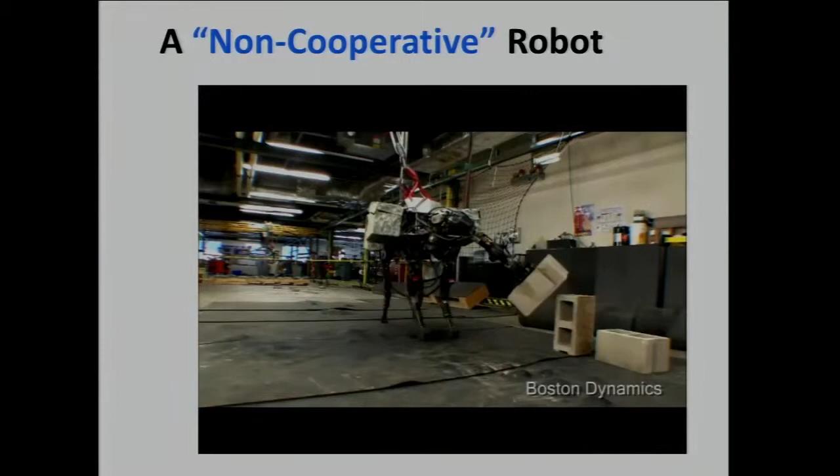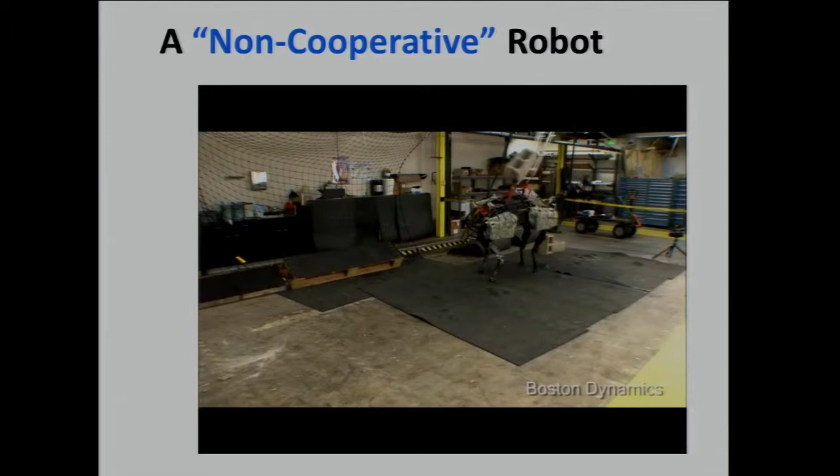The question is, do you want to hire that as a babysitter? But look at this — this is really stunning. Look at the grace with which this balances, shifts its weight, compensates for a change in mass, compensates for momentum. And what you should know is that there's no brain — that's all accelerometers and local feedback loops and things of this kind.

This is done by a company called Boston Dynamics, an extremely interesting company which focuses on non-cooperative robots. Now I want you to consider a world in which you take that kind of thing — which I can't tell, with my not very good eyes, whether it's alive or not, it's so graceful in its physical movement — and I combine it with artificial intelligence.

Will we be able to understand whether we have something that's alive or not alive in the future? How are you going to tell? There's a test you should all know about, called the Turing test.

It comes in several versions, and this is the simplest of these. Mr. Turing, for those of you who haven't seen the movie called The Imitation Game, it's a terrific movie, was an early computer scientist who had great influence in World War II. Mr. Turing proposed the idea that if you've developed a machine that might think, that might be intelligent, how do you tell whether it's a machine or one of us?

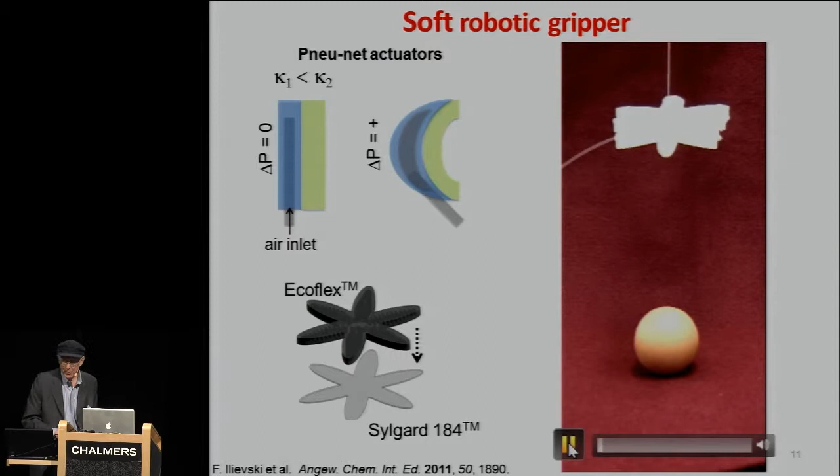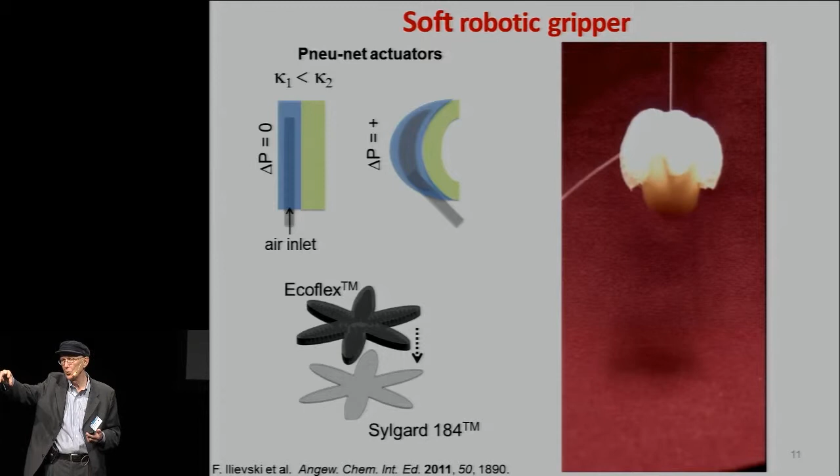So this is where we started, and the characteristic of this is that it's about as simple a problem as you can find: an uncooked egg. If you try to pick up an uncooked egg with a conventional robot, it turns out to be a really hard problem, because you have to have pressure sensors, you have to not pick it up with too great pressure, or you'll crush the shell, things like this.

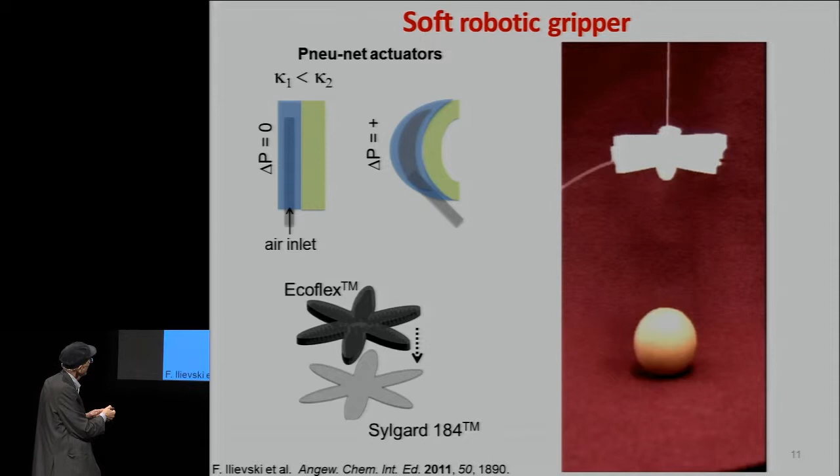What this is, basically, is just a balloon. So you have here an elastomer. It has a structure in which there's a layer that's flexible but cannot stretch, and another layer that's flexible but can blow up when you inflate it with this little pneumatic line here. And when it blows up, this part expands, that part simply bends, and it reaches around the egg. It can't apply more pressure than the pressure you apply on the input line, so it's automatically self-regulating. And it does something you can't do with a hard robot.

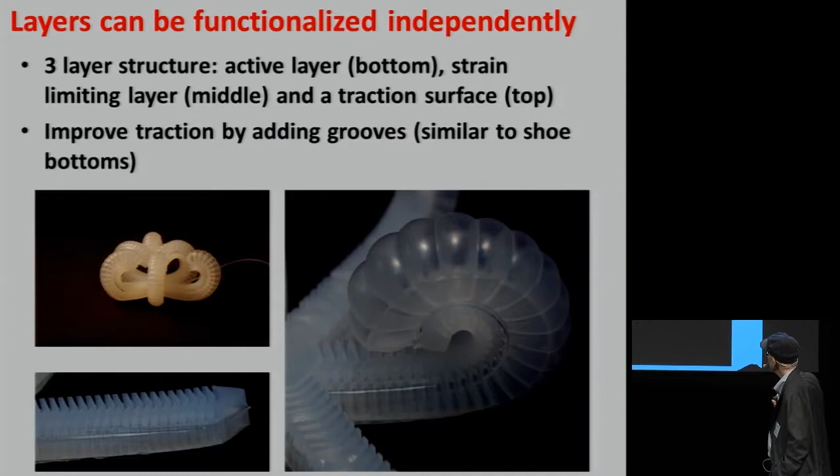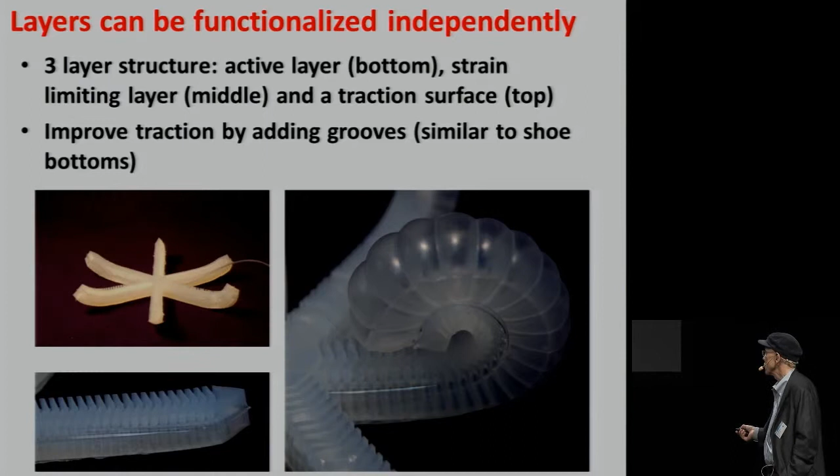Now, there's something I want you to look at here, but the major thing is this: what you see is one of these tentacles that's blown up, and what it looks like is a series of little balloons, if you look at this. I'm going to show you how you make such a thing in just a moment - you can make them very easily. I also want you to see something else, which is that as these tentacles curl, they curl from the tip. That turns out to be what we call in science a materials nonlinearity, and it is an extremely interesting, underexplored, and useful part of this particular world and problem.

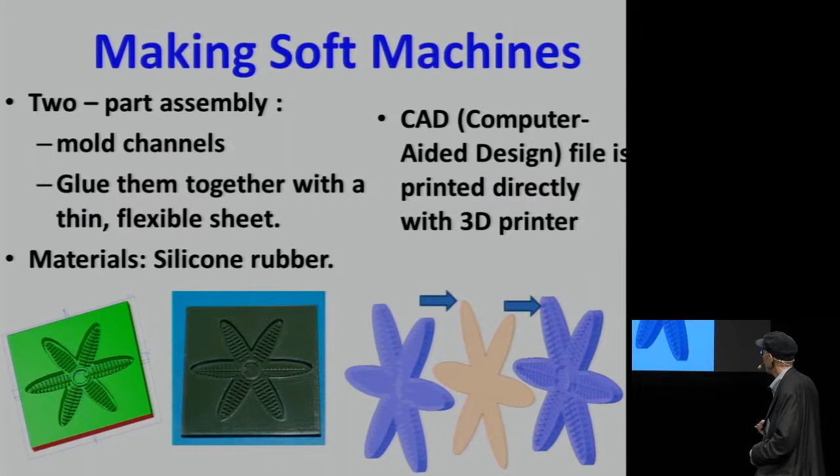How do we make these things? Entirely straightforward. You use a 3D printer, which I suspect all of you are familiar with from MakerBots. You make molds, and in the molds you pour a polymer that is a soft elastomer. To give you an idea of how soft is soft, these are the same polymers used for cheek implants and breast implants and things of that sort - that's the general texture. Then you paste these together in some appropriate way, and you can go from a design to a device in the course of a morning, for nothing.

And it turns out that high school students everywhere are now making these things. And this is pure envy, Ahmed, wherever you are. I refuse to be seconded in important things like musical interludes.

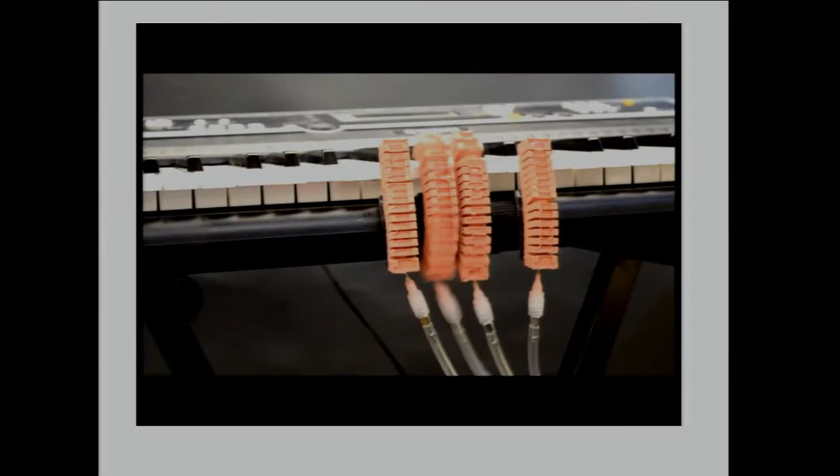So the reason for showing this is that one of the questions people asked at the beginning is, can you make these things operate rapidly? Although I'm not going to show it, you can actually make a chameleon tongue which can catch a fly. It catches a fly one time out of 100, but that's because there's no chameleon backing it up.

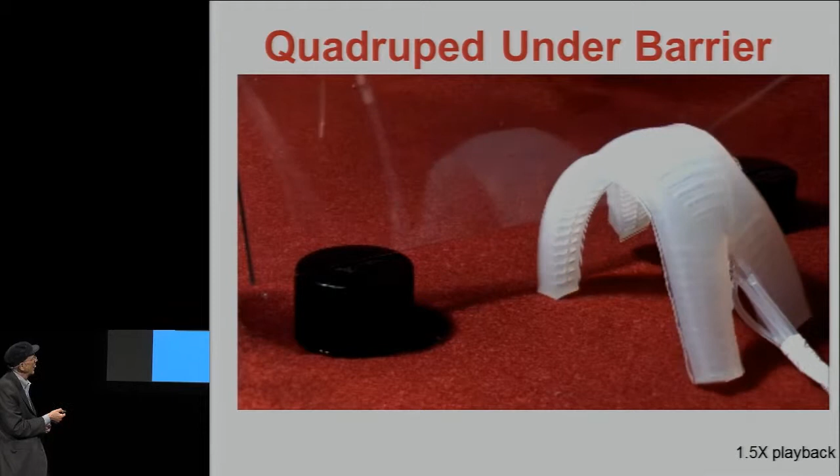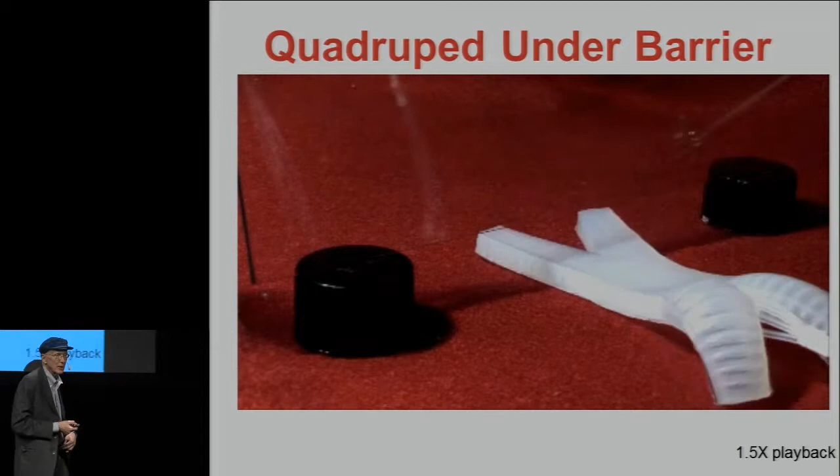Now, what about the undulation part? Here is a walker which is undulating, and there's a kind of clumsy walk, and here it gets to the barrier - that's a glass plate - and you say this really doesn't look to you like a fantastically flexible and agile object. The reason is that this does have a sort of brain, but the brain happens to be a Scottish postdoc who's off screen.

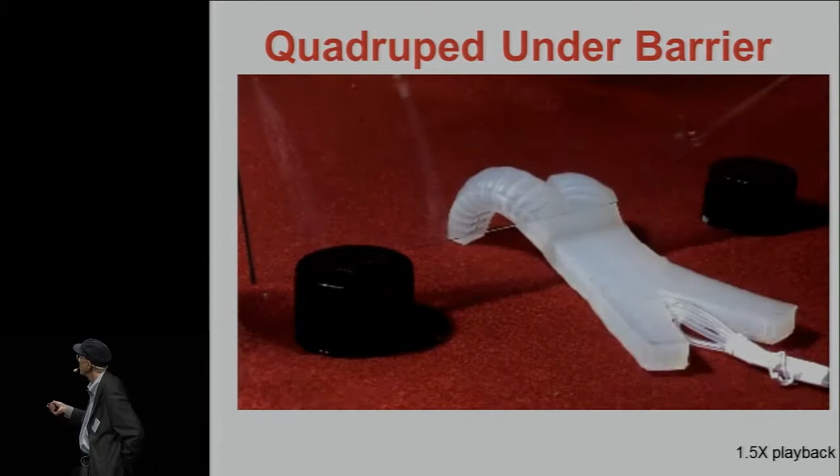Who's running a series of chambers. This has 5 chambers - there's one here, and then one here, here, here for each leg. So it involves 5 switches, and this is complicated in a country that, I won't say it. It just has something to do with sheep.

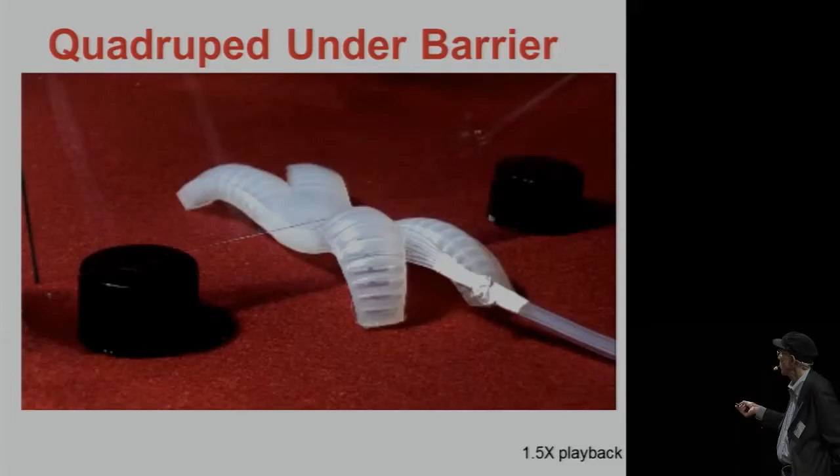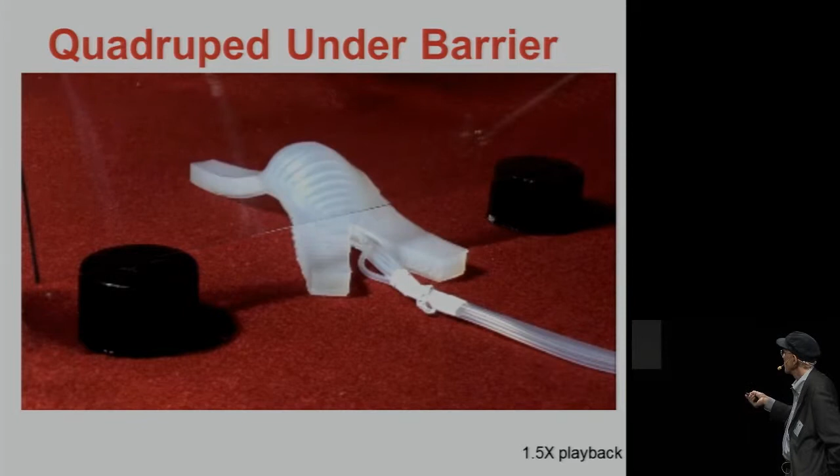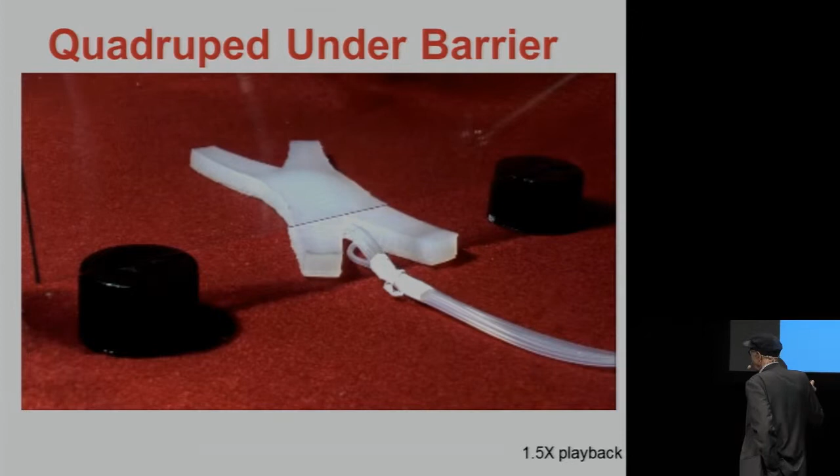But so what you'll see, and I again want to go all the way through - it's almost heart-rending, the ends of this. It manages to ooch its way into this. We have technical words for these gaits, like ooch and walk. And so here it is, and it's trying so hard. And then at this point, it almost gives up. And then it will reconstitute itself, gather its strength, and go on and walk off on that gait.

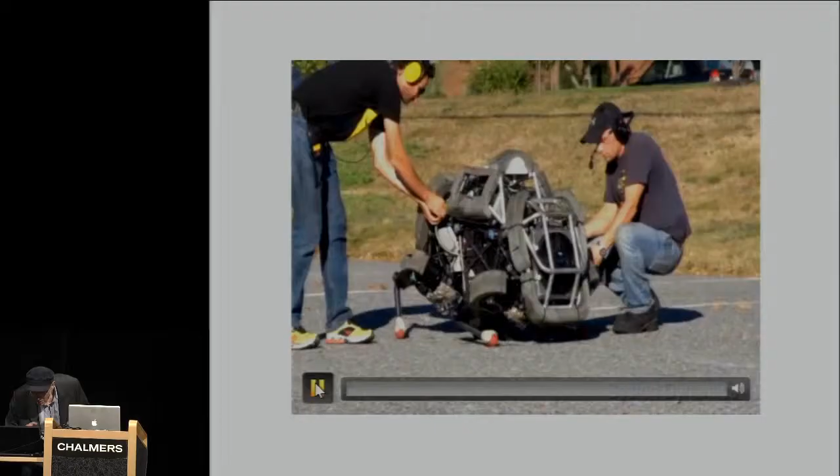But so, we have something that goes under the barrier now. But I want to show you a contrast. Here is another one of these nice devices, and I want to show you this to make a case.

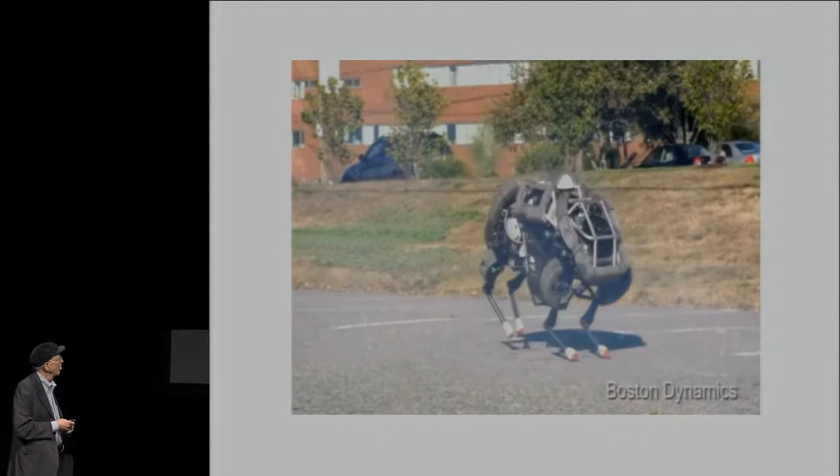This is a device called Wildcat, and it's run by something that's effectively a lawnmower engine. It's actually a very clever device, and it'll go off here and prance its way back.

There are a couple of things to know about it while you're watching it. One is that this is roughly the size of a pony. A pony operates on about half a horsepower because it's about half the size of a horse. This operates on about 50 horsepower, so it's about 100 times less efficient than an animal is. We don't actually fully understand why there's that difference - that's an interesting problem in basic science, connecting physiology and mechanics and molecular science.

And it's a good runner, gallops along, but there is a little something, yes. I just wanted you to know that they may not be infallible, these devices. This is another reason for not getting too close.

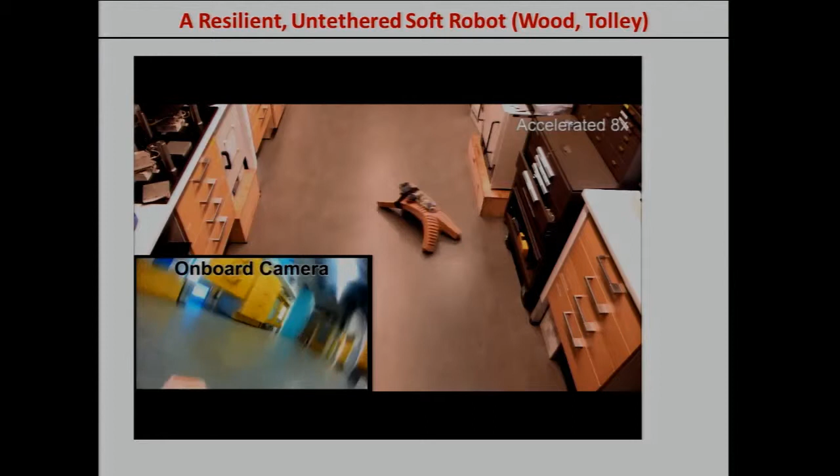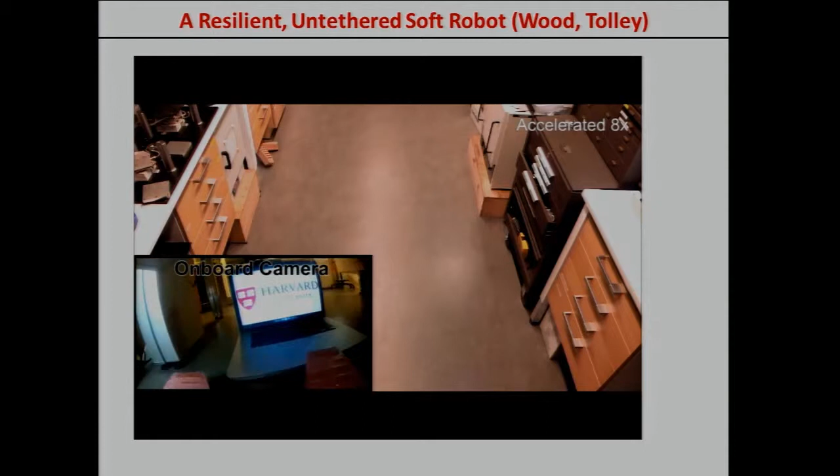Now, we can do the same thing, but we just do it more slowly. Here's an example of something which is untethered. It's got a little compressor on the back here and a Bluetooth link, and it is clearly much better than the device I showed you if what you have in mind for your morning's recreation is to crawl under a laboratory bench and look at a TV set that happens to be under there. Probably not what most of you do, but it operates that way.

All right, now let me show you another thing which is interesting about these systems. This first thing you've seen in a slightly different fashion - this is now a hand-shaped object picking up an egg. This has the equivalent of knuckles built into it, and one of the things you can do with this is explore what we call in the group 'life that never was.' So we can make hands that have 7 fingers, hands that have 4 thumbs, hands that have claws, and hands that have all kinds of things. They're very easy to make, and this picks up, and that's fine.

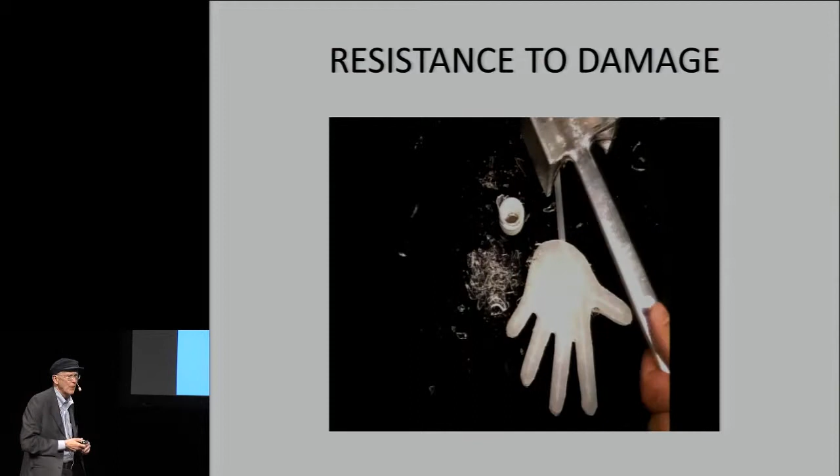But what I really want to show you is the next thing, which is this - that's a hammer. And this, ouch. And to show you that it's real, there. Now, the point of that is that you almost can't break these things.

For example, we've done the experiment of throwing them off skyscrapers, and the terminal velocity, because they're lightweight, is not enough to do them any harm when they hit. You can cut them, but you can't break them by blunt impact. You can shoot a bullet through them, but you can't do otherwise. It means they're almost indestructible, and you can't do that with a hard robot. There are a bunch of other things you can do, and I'll just show you one, for example.

Suppose that you receive in the mail a polystyrene box, and you're not sure what's inside. You take something like this dripper, which drips acetone onto the casing to dissolve it. This tentacle has a little camera in it so you can look at what's there, and you can drip acid onto any contacts you find. It has the potential to be useful for people who do, for example, counterterrorism.

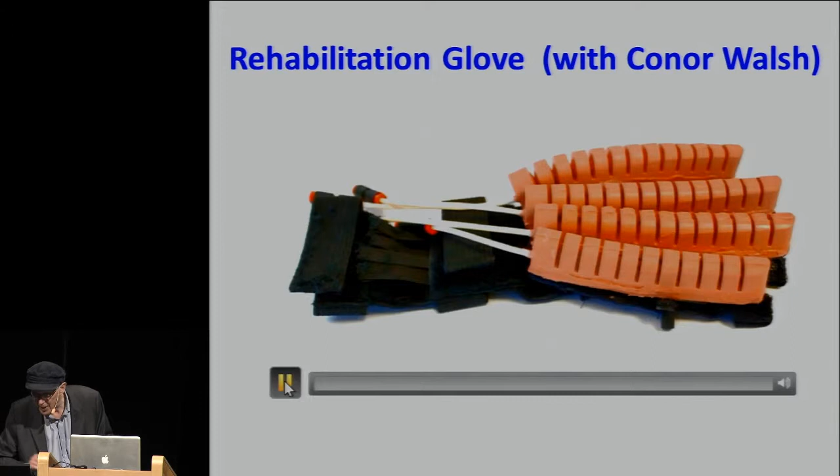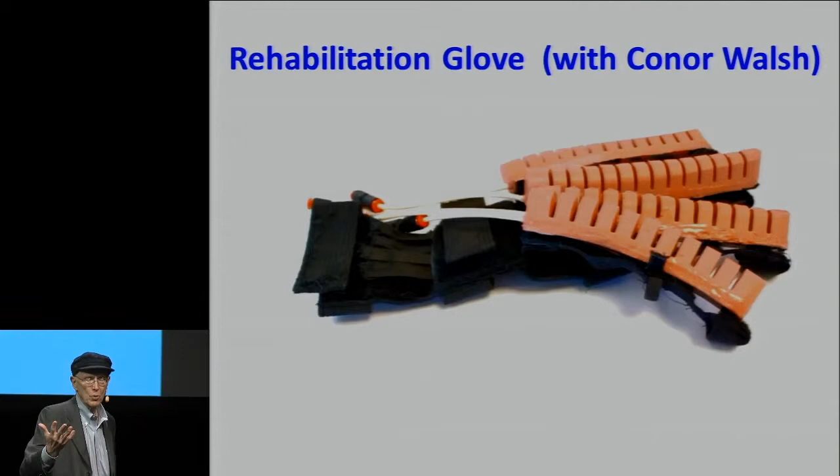But there are also some simpler, interesting ideas, like this example of rehabilitation. When you're older, one risk is having a stroke, and afterward, depending on where it occurred, part of your anatomy may not work. It's important that someone manipulate your hand to avoid the development of spasticity, which is the permanent locking of fingers into position.

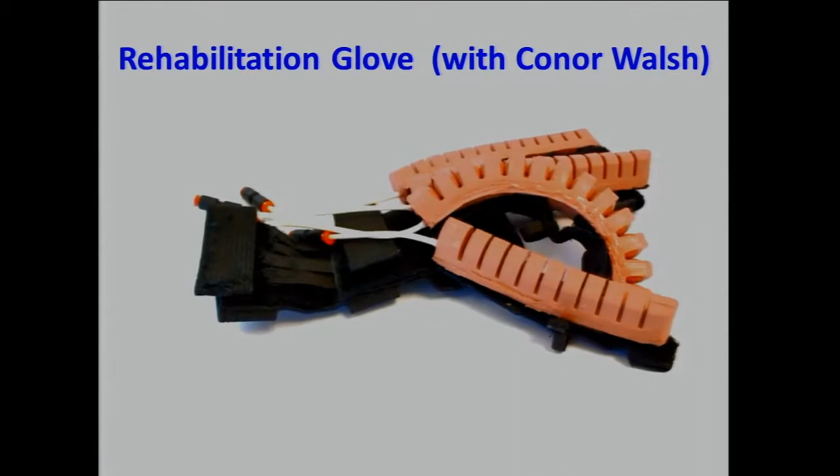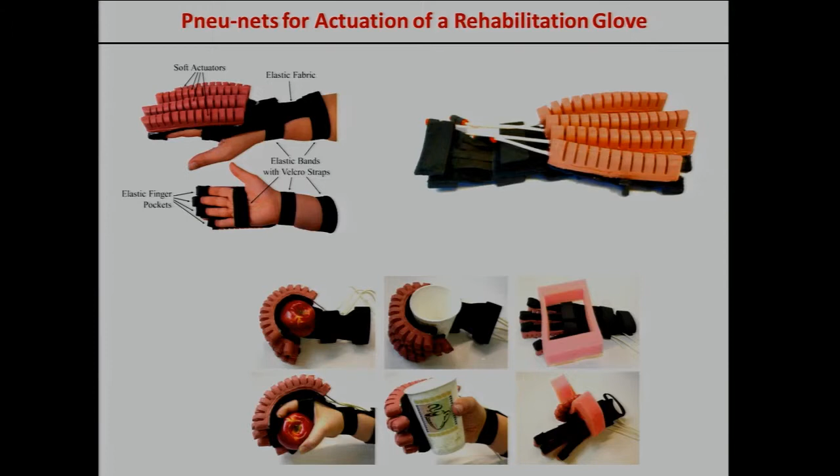That's not a particularly interesting job, so what we've done is simply take these finger-like objects and strap them onto a glove from a hardware store. Then you can do the flexing. This is a case where the machine is designed to be compatible with people—compatibility is the key. You can use the same kind of machine to strengthen a weak grip or give extra control if you have neuromuscular control problems.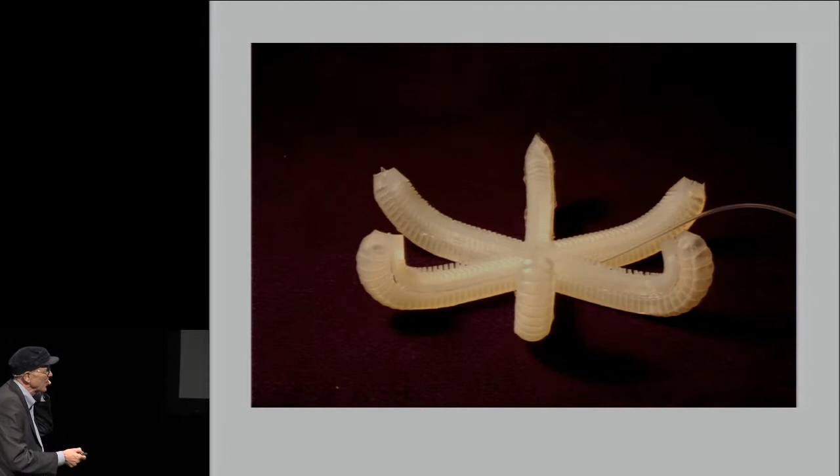These are very simple and interesting systems to work with. Now, just one small thing in terms of science: this business of working from the end, opening and curling up like that, is actually a very subtle and interesting scientific material science problem in nonlinearities.

One reason it's interesting is that it opens the door to a feature of these systems I'm particularly attracted by. If I wanted to build a hard robot that did that, I'd need a whole bunch of servo motors and sensors to start curling up from the end. I don't have to do that here. These offer the opportunity to replace control systems with the properties of materials and designs, which gives a lot of room to simplify the system.

Two final examples—we're not fixated on squid, we don't have a particular thing for squid. We also like spiders. I won't go through the details, but spiders' joints are extremely interesting, a very clever piece of design. So you can begin to use other animal models.

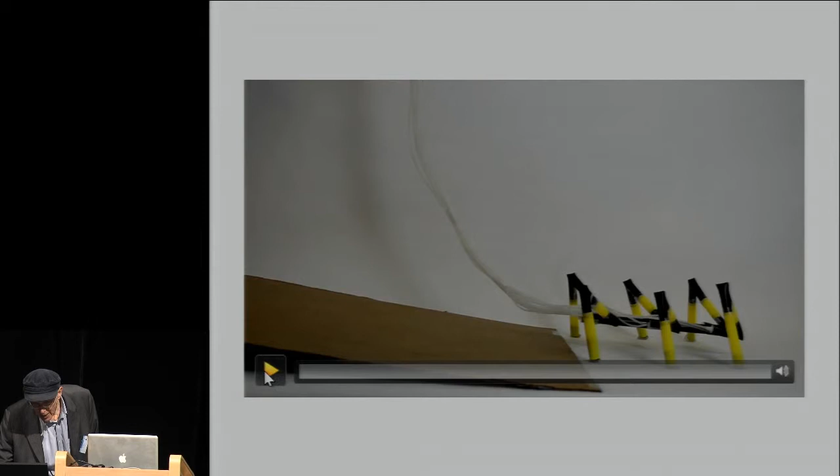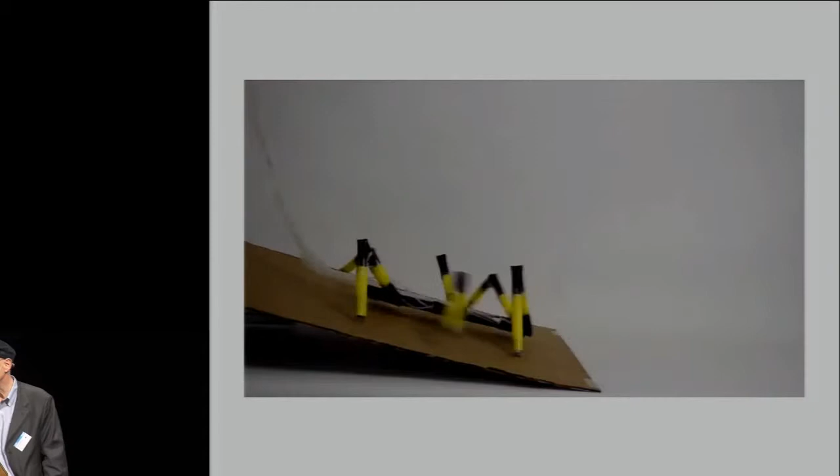This particular object is designed with six legs like an ant, but it operates with the same joint actuation mechanism as a spider. I won't go through the details—just know that everywhere you look in the animal kingdom, there are different designs of actuators, and all of these can be thought about in this fashion.

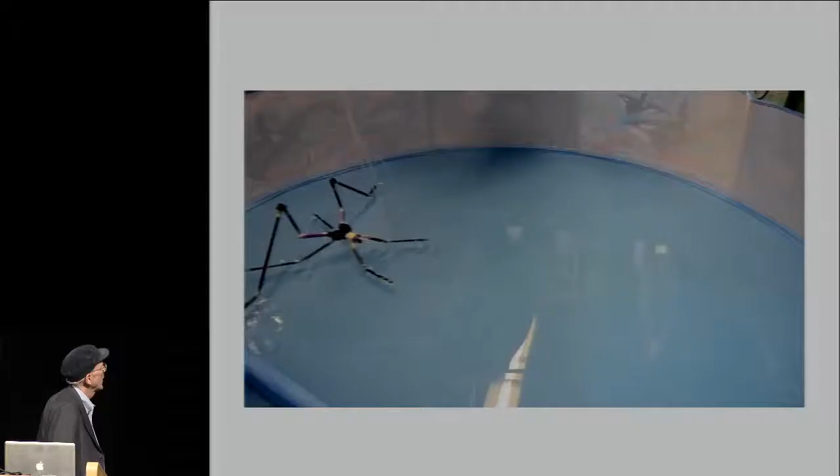I don't actually know what this video is—oh yes, this is the water strider. Here's another one of these kinds of things. What you see here is a device light enough in weight, with surface properties tinkered with so that it sits on the surface of the water. You can't do that with a heavy conventional robot.

Let me close up with two things. First, a summary: soft robots should not do things that hard robots can already do. They should work—these are designed to work with people and to be cooperative. Collaboration is the key. Robots are going to happen, but I think it would be awfully nice if the scientific and technical community built robots that improved or augmented your capabilities rather than competed with you.

Cost is a major advantage—these are inexpensive enough that they can be used once and thrown away. And then applications, there's just an enormous number of things you can do with these. Surgery, because they're soft, rehabilitation prostheses, I've talked about this. Handling fruit, I'll show you an example. Search and rescue, as in Fukushima, where you want to send something in to take a look and then throw it away. Hazardous tasks like mining. And then gripping—it turns out that the big deal in terms of applications is actually gripping.

This is from a company that's spun out of this work. The first paper in this was published in 2011. In 2013, we started the company, and this is what the company is doing. There are a number of things here that are illustrative.

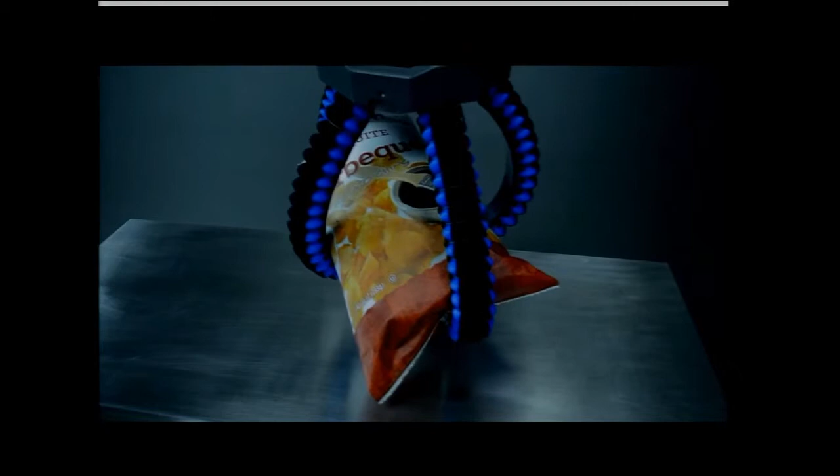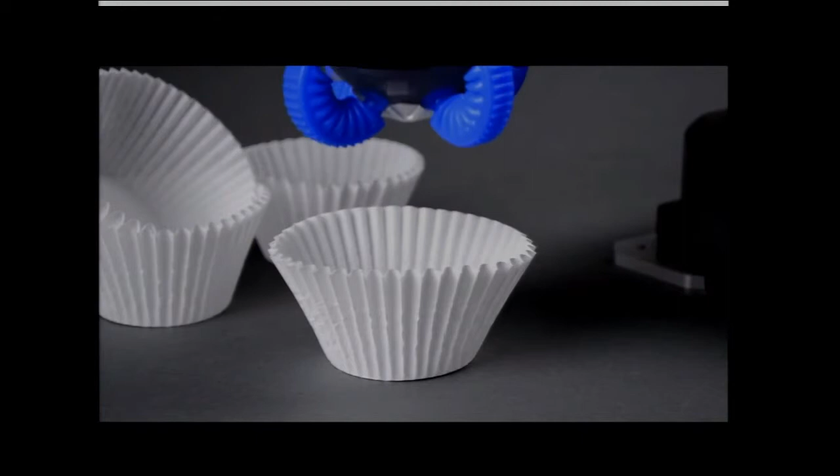These are all grippers. This answers the question of, can it pick up heavy weights? This answers the critical question of, can it pick up potato chips? That turns out to be very hard, because if you pick them up wrong, they crack them. This is fruit picking—look at the dexterity of that. These are very fragile, lightweight things, and it gets picked up. And then a task which we all face almost every morning: picking up cacti.

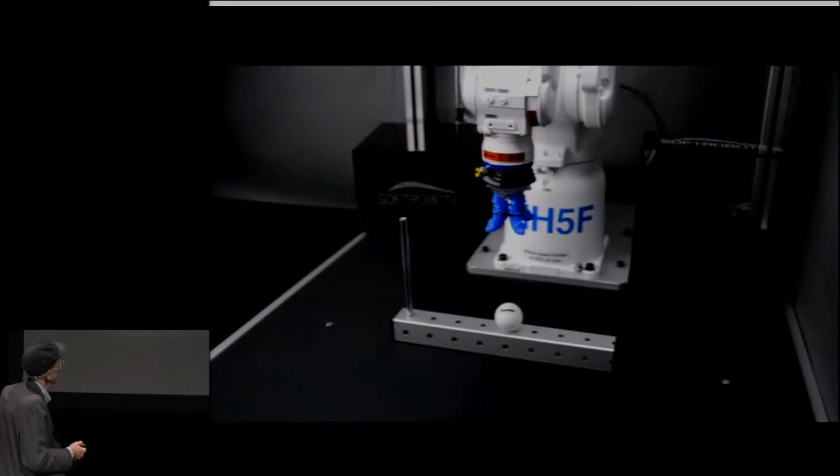There are a couple of other things very quickly to show on the same video. Look at the versatility and the agility of this system. This is our gripper here coupled to a commercial arm, and the characteristics of that—look at this is really neat. It catches it, and we'll put it down. These will almost certainly be used in combination with a mechanical arm and then something of that sort to put things on top.

So, oh yeah, that part was actually very interesting—I don't think I can go back and do it again. But the point is that with these combinations of mechanical arms plus effectors at the end, you want to be able to change from one to another, and this is just a question of picking one off and clicking the other one in. So this is a case where one can go from polymer science to robotic technology to commercial application in just a couple of years.